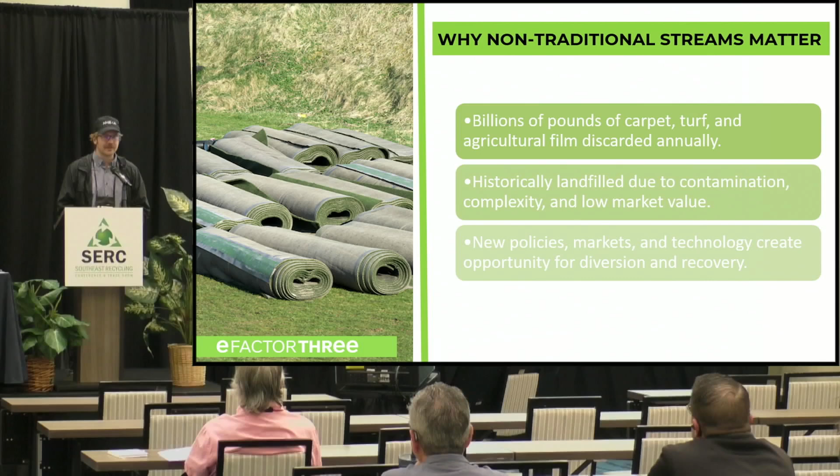Here's a little bit of statistics on those streams. Carpet makes up 4 billion pounds annually, and less than 10% of that is recycled. A big part of that is because it's simply difficult to recycle, and a lot of people don't have those solutions. Artificial turf is well over 200,000 pounds per field. Agricultural film is over 1 billion pounds in North America, and well under 20% of that gets recycled. This is luckily being phased out, but a lot of this stuff gets burned in the field. They collect it up, put it on the field, and burn it.

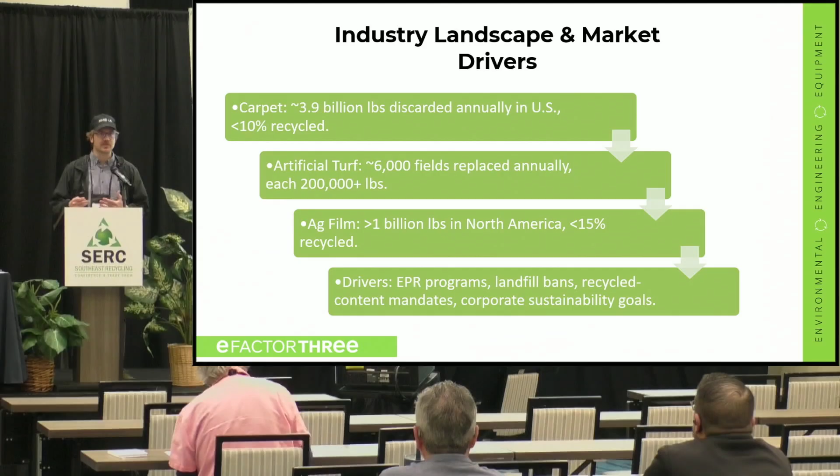What drives the ability to recycle these things? EPR programs, landfill bans. We've seen this in California. California has mandated that certain percentages of organic materials are taken out of the stream before it goes into a landfill. That's allowed us to go in and help our clients recycle more of their streams, even going into landfills, not just traditional recycled streams.

What generally makes these non-traditional materials so difficult? One thing is multiple layers. It's very easy to recycle a pure polypropylene or polyethylene stream, but when you have things like carpet or multi-layer plastics like you might see in a yogurt cup, that gets more difficult, because how are you going to separate those materials and then process them all individually? Each different yogurt cup or each different carpet might need a different processing technology.

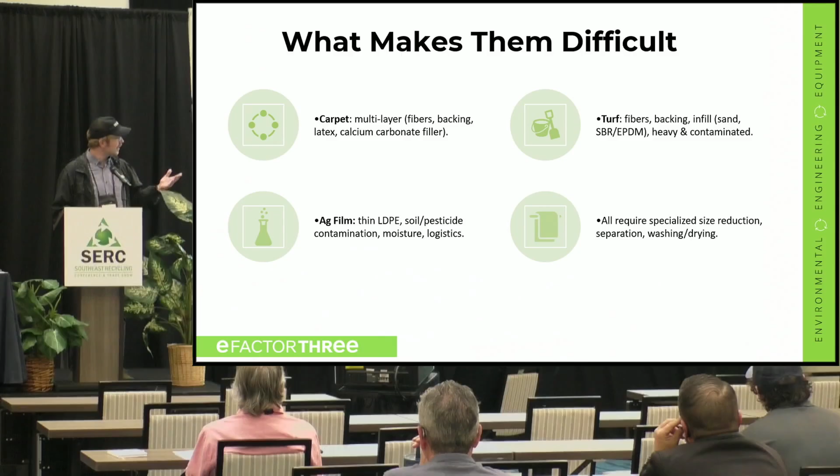Turf and agricultural film are difficult because they're thin and have been sitting in the sun for 6 months. UV degrades it, it can kind of fall apart just like feathers. Not only that, it weighs pretty much nothing when it's dry, so it's difficult to transport. All in all, these different material streams require specialized size reduction, separation, washing, and drying technologies.

So where do we see most people go wrong? eFactor 3 has been around for 20 years, and in those 20 years, we've worked a lot with companies trying to attack these non-traditional streams. What makes them so difficult? Number one, I think the most important, is underestimating just how dirty these things are and how difficult they are for the machinery.

Let's take agricultural films, for example. Agricultural films can be 50% dirt, just grit, sand, corpses of dead animals. Anything that you would find in a field on a farm, you can find in these streams of material. What that means is it's really tough on any machine you run it through. A shredder or a screen will quickly degrade or wear down and need constant preventative maintenance. We see people constantly underestimating those needs.

That ties a little bit into those operating costs. Clients will see a low price tag on a line from a different vendor, and yes, that line might be able to get them started, but what they don't see is the high cost of then keeping that operating because of the difficulty of the material.

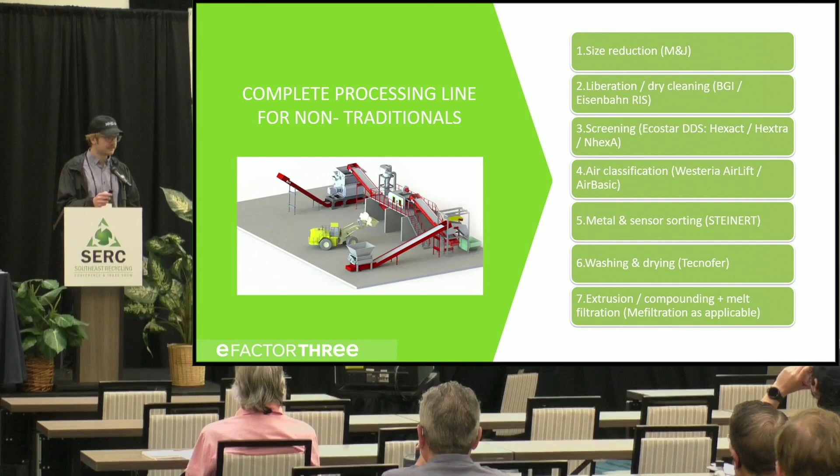How can E-Factor 3 help? Well, exactly that experience. We have seen these projects from beginning to operation, and we've seen the missteps that people have made in these non-traditional waste streams.

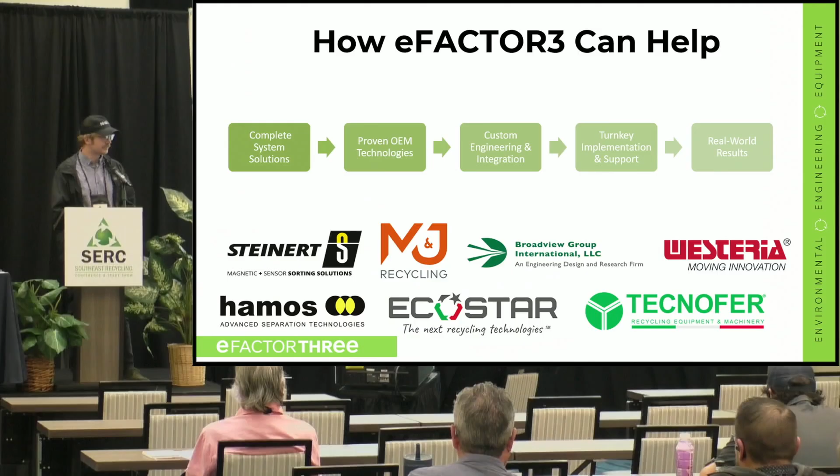As I mentioned, the M&J pre-shredder, primarily a pre-shredder, but they also produce fine shredders. What's important here, again, is the coarseness of the shred and the robustness of the machine. The pre-shredders do not do a shear cut, right? They're not like a traditional fine shredder. They simply pull the material apart. That's important so we have that initial step of separating the material and liberating it.

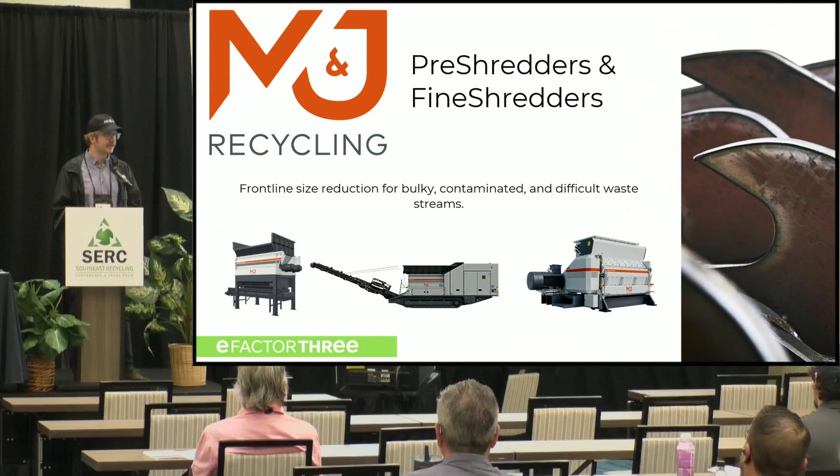If you have layers of plastic stacked on top of each other with dirt trapped in the middle, you need a way to get that dirt out in the first place.

This is our newest partner, Broadview Group International. They produce a piece of machinery called the Rotary Impact Separator. This is a form of dry cleaning, but instead of relying on friction, it's essentially a modified impact separator, kind of like a hammer mill turned on its side. The reason this is so effective for agricultural films is, again, we're not relying on that friction.

That's a misstep we've seen a lot of manufacturers make. They use a traditional wash line, like one used in bottle recycling, and try to use it for agricultural films. Both the manufacturers and our clients haven't taken into account how different this non-traditional stream is. That dirt contamination settles in the bottom of their tanks, and then they have to stop, and one poor schmuck literally has to dig dirt out of the bottom of a tank.

But the Broadview Group International RIS is different in that it uses pure dry cleaning. We can get to about 1% ash content and 0% humidity in one pass.

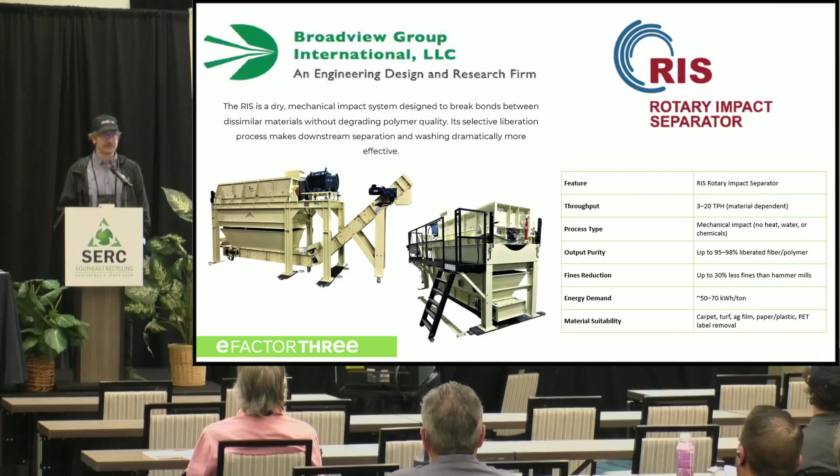This is another one of our partners, EcoStar, and what's important about this step in the process is the screening technology. If you've liberated the material and put it through the pre-shredder, you now have a separated piece of plastic with a bunch of dirt on it. You don't want to take all that dirt downstream, so you can shake a lot of that loose stuff off before you ever go into your cleaning process.

So we pre-shred, then we screen, and then we'd go into some kind of dry cleaning process. Now, if the client needs cleaner material, we can go into a wet washing process, but it's critical that we take these steps beforehand.

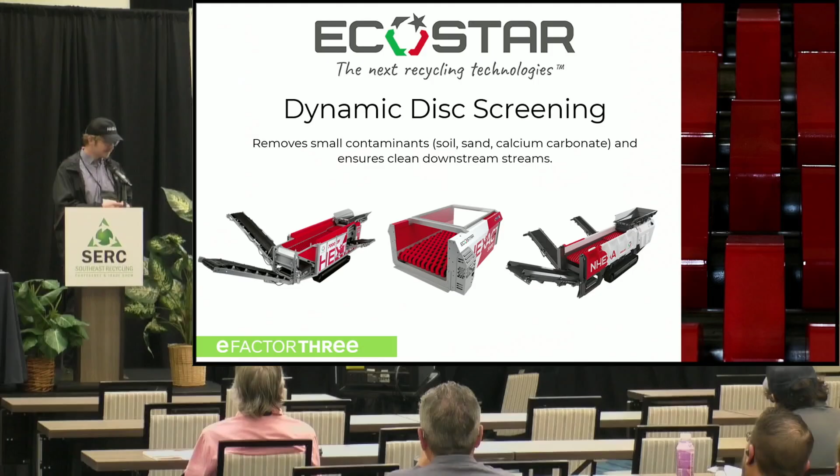This is another technology we've worked with for a long time and recommend for these applications: the wind sifter, for density separation of materials. In agricultural film streams, you get anything you'd find on a farm—crowbars, root balls, rocks, all kinds of stuff. With a wind sifter, you get out that heavy material. Each step in this process has a very specific reason, and we've come to those conclusions over years of testing. So the wind sifter takes out all those really damaging, heavy pieces of material.

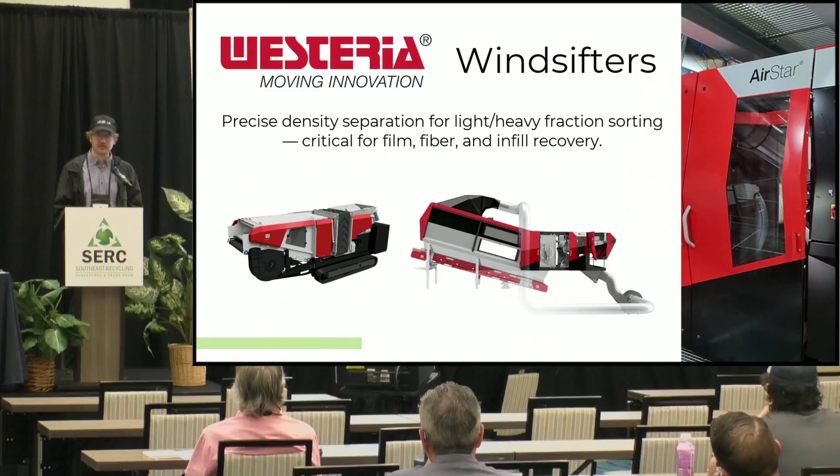I don't know if either of them are still here, but one of our main partners, Steinert—Tim Berry and Scott Chase—were here yesterday. They produce magnets and eddy currents, which are essential in really any recycling business, because anyone who's operated a fine shredder knows what happens when you put metal inside one. Boom. That's never a fun day, especially for your maintenance crew, and it's also costly on the accounting side. So especially in an agricultural film application, we need some kind of magnetic separation to get out these pieces of contamination you'll find on a farm.

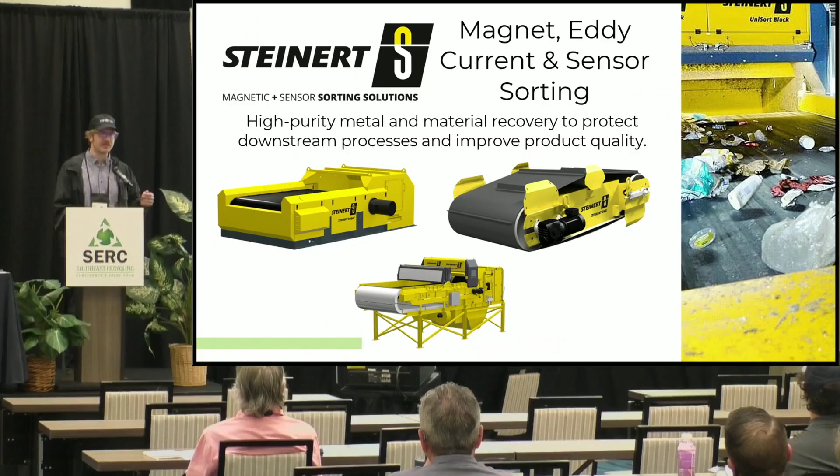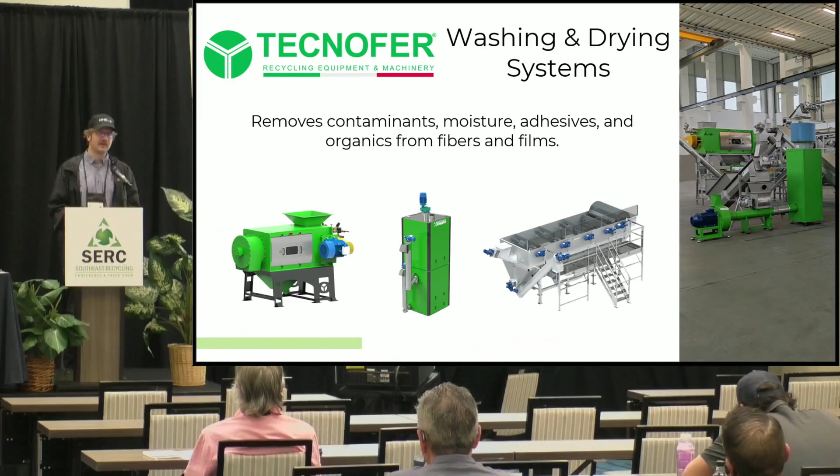What happens when we need to go so clean that we want to go back into blown film or something? Well, then we can go into a wet washing process—friction washers, sink float tanks, etc. These can help us get down to almost 0% contamination so that we can go into delicate injection molding processes, blown film, and so on.

This is just kind of A to Z how we would set something like this up. Again, we're pre-shredding—this is not a fine shredder doing a shear cut, just pulling the material apart. Then we pull out the metal so it doesn't affect our downstream equipment. We screen that material so any loose stuff already gets out—we don't want to put more dirt through a washing system if we don't have to, so we take out any loose dirt we can. Then the wind sifter takes out any of those heavy things that might have been too big to go through the screen but that we still don't want in the downstream equipment.

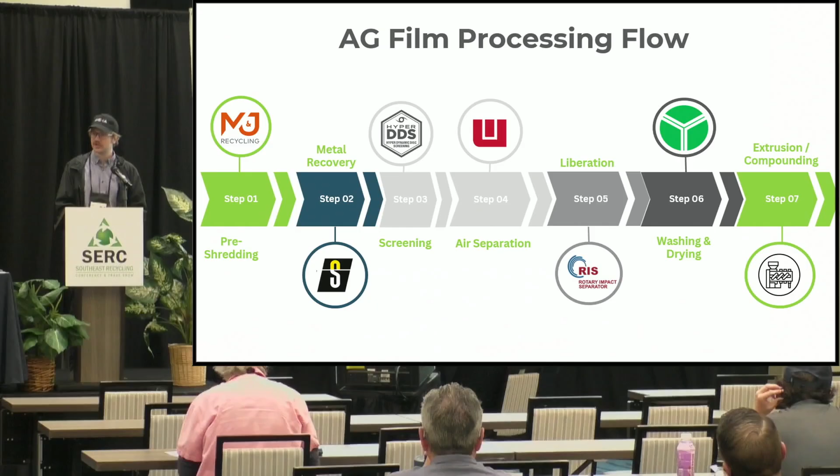The RIS impact separator can now get us down to about 1% ash content and 0% humidity. As mentioned, when we're going into delicate end products, we might want to wet wash that material. And then, last but not least, extrusion and compounding.

I'll give you a little background. We started about 20 years ago in the biomass arena, processing primarily corn stover from the Midwest and making fuel, so we're funded by the Department of Energy primarily—we're more of an energy research laboratory. Just a little information: people think, oh, you have a small laboratory, but the INL is bigger than the state of Rhode Island. We're actually a big area-wise facility because primarily what we do is nuclear research, and we take that research out in the middle of nowhere—the government owns all the area around it. So we're a very large landmass of a research facility, and a small part of that is the bioenergy program we're part of.

Back to that—we started out with corn stover. Back then, the concept was take the corn stover, make it into a pellet, transport it wherever needed, and make ethanol from that. That was originally the direction we were going. Since then, we've moved more into electric vehicles than gas cars, so we've kind of gone away from ethanol, but we still process corn stover. We do a lot more than that now, moving into MSW and e-waste and different things, because of the knowledge we gained in processing materials. Again, we're a research facility.

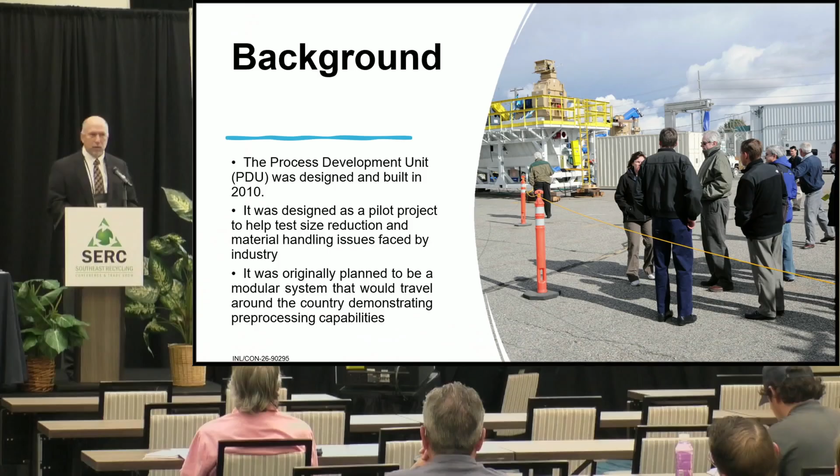We work with industry to help them overcome some of the challenges that they're facing, help de-risk and take care of some of that processing stress away from them as they're building new processes.

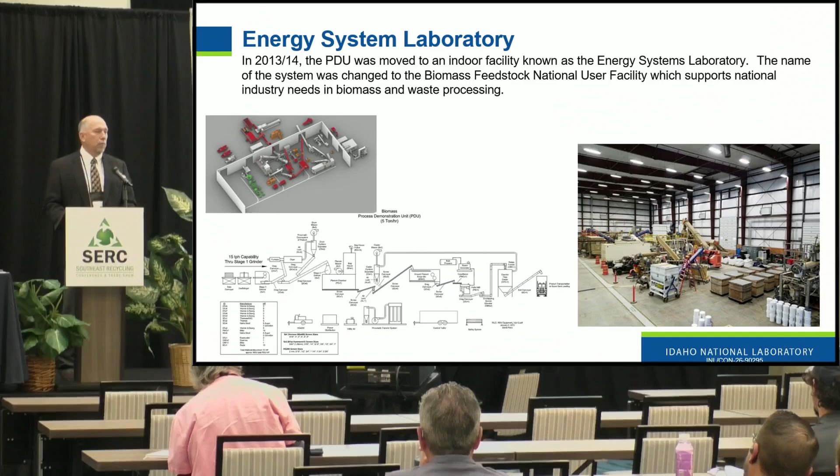Back in about 2013, 2014, we moved into the facility where we're at now and got the designation as a national user facility. Prior to that, as a process demonstration unit, all of our system was built in cargo containers, and we could ship it around the country. That was kind of our thought, that we were going to go around and demonstrate all around the country. We never really did much of that. We stayed pretty much in the Idaho Falls area, and in fact then moved inside this facility we have now and set up our system there, and it's more permanent. We still have the ability to loan out equipment and go test other places, but we really primarily operate out of the Idaho Falls area.

Like I said, we started out doing corn stover and wood waste. Making ethanol was our early process. Now we process a variety of different materials, whatever our industry partners come to us and say, hey, we need help with how do we process this material. So we've done windmill blades, municipal waste, circuit boards, in addition to the traditional corn stover and other materials we started out with. When we started out doing the corn stover, the concept was let's do it in as few steps as we can to get the product into a pellet and get it out and move it downstream.

Just like what Lennart was talking about, some of those steps are important. You can't eliminate a step and think that you're going to be successful downstream. Early on, the industry really pushed to say, we're going to grind these bales in a single step. Well, you talked about how much dirt and stuff comes in with the waste you got. The same thing is true of a corn stover bale. We get a corn stover bale in, maybe 30% dirt, and we might have a hammer or a crowbar in there as well. And if we try to grind that all up in one step, we're going to damage our equipment, and we're just going to send that material downstream.

So we learned early on, it's important for us to break that bale apart, get the dirt out, get the rocks out, the contaminants out, and then start processing it in a way that's going to give a better final product to the end user. We've taken that concept to all of our different materials.

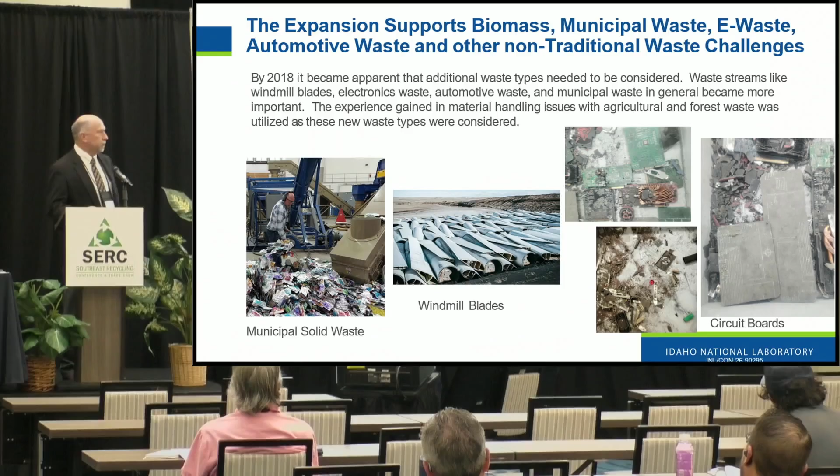Back in about 2020 and 2021, we had an expansion. We realized how important it was to have these different components in our system to be able to screen out contaminants, grind specifically to what our customer or our partner was needing, and then make it into a final product. Again, our primary goal along the way has always been energy.

Now we work with industry partners, and that may not be the case at all. We've worked with companies like Kimberly-Clark making toilet paper, R.J. Reynolds making paper for tobacco. So we've done a lot of other things besides energy, but that's our main focus from our funding from the Department of Energy.

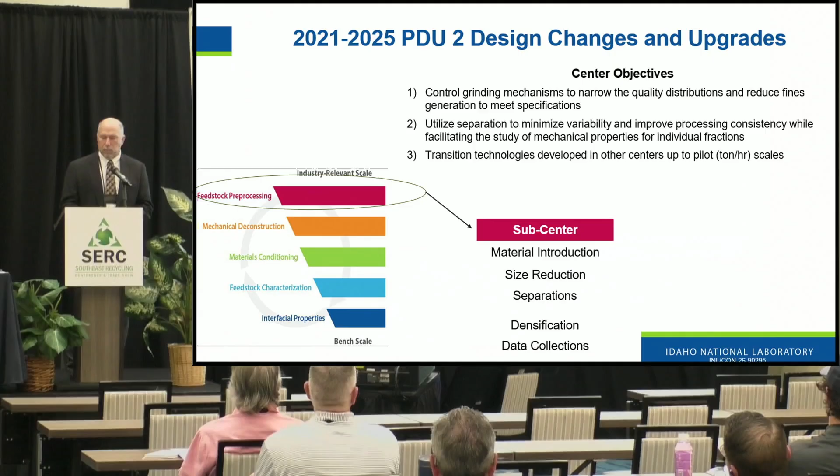But we started building this facility up and expanding it, really looking at how do we take that material in, how do we get it broken into or fed into our system so that we can pull out contaminants, what type of screens, what type of grinders do we use. So we started building a different system than what we started with when we were just primarily working at corn stover.

So again, looking at material introduction, we partnered with a company right now, Warren & Baerg out of California, where we originally were doing this baled corn stover, now where we want to handle MSW, and it's a whole different process. So they've been working with us to develop a debaling system, so we get in the baled MRF residuals, for instance, and want to break those apart.

We have a lot of trouble with those, the film plastics wrapping around our mills. So how do we break that bale apart, pull out the film plastics at the same time, get that material flowing to where there's still a lot of rocks and grit and glass in there that we want to pull out and start sorting that. So material introduction, I call it, is the important first step of that. How do we take that material and get it flowing into our system where we can start working with it?

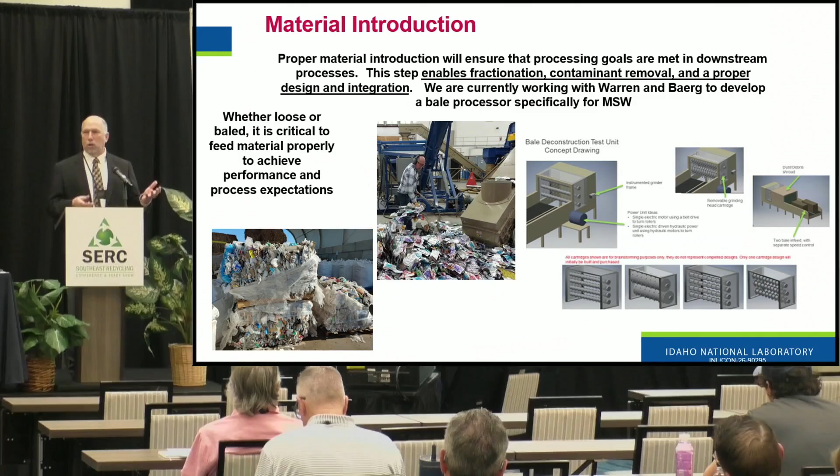Then we've got a series of different types of grinders that we work with. Some of the folks here at the expo, Vecoplan is one of the shredders we have. Forest Concepts is a system we have. We work with ball mills and with the circuit boards. Hammer mills was our old go-to from the beginning. Knife mills and different. So depending on what our customer comes to us with and says this is the material we want, we're going to use a different type of mill for that process.

Or if we are working with a MRF residual like we are in this case, we're going to try to separate the plastics from the paper and cardboard, and each of those may go through a different milling process.

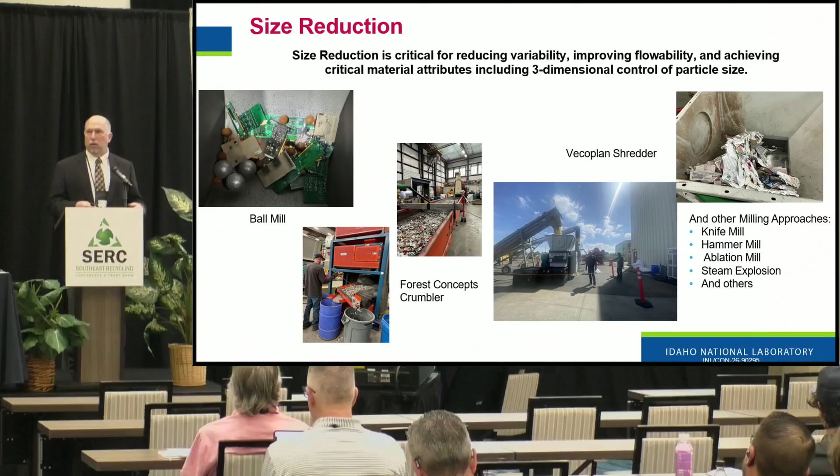Separation and sorting is a big part of what we do, and same with what Lennart was mentioning, we got to get the dirt out. So in this case, Stadler's here, we actually have one of their ballistic screens here. Let's say we're dealing with MRF residuals. We're going to bring that material into the ballistic screen fairly early on. It's going to separate out our two-dimensional, three-dimensional materials, drop out 2-inch minus out the bottom, and each one of those streams we're going to process differently. So screening and separation is a big part of what we do.

Even if we get down to maybe we've isolated plastics, there's different densities of plastics, and we'll size those to a certain size fraction. We can separate that based on density.

So again, just depending on what the customers are after, we're going to tailor that process and help scale that up. We aren't a production facility, but we can produce material up to 5 to even 10 tons per hour for some processes. We typically, a lot of our testing is done on daily small batch operations, but we have tests that have run for 6 months, 24 hours a day. So we can tailor our process to what a customer needs.

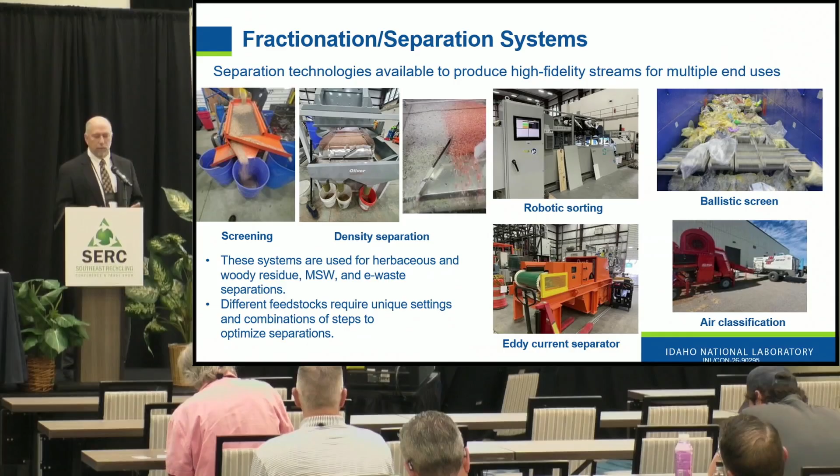And again, we're a user facility. We can operate a number of different ways. We have grants and funds that we can help work with you directly on, but when we do things like that, usually we want that publicly disseminated information. We also can work off of a private contract with an individual as well. Anywhere from public information that gets put out and we fund it completely, to completely funded by our partner, and the data is completely proprietary. So any of those processes in between there is what we can do.

Again, going back to the screen, in one case we were working with a local Native American tribe close by us, the Shoban tribe, and we were working with black bag garbage directly from residential waste. They wanted to look at what they could do, they didn't do any type of recycling at their facility, and we were working with them to help them identify what they could do.

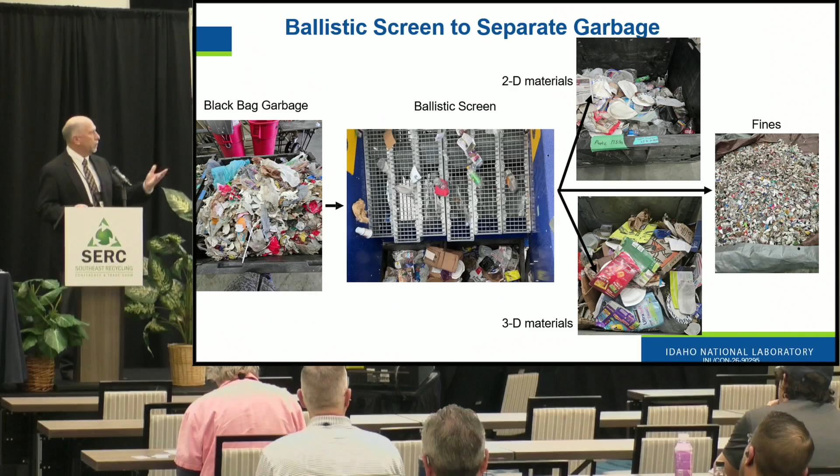So we took in black bag garbage, ran it across the ballistic screen, got the 3D material and the 2D material separated out and the fines, and then started looking at how we handle each of those different materials.

We took the 2-inch minus material, ran it across the disc screen, got some more of the contaminants, the grit and stuff removed out, and took the remaining material and went through a size reduction process and a density separation. So we were then able to get our high density plastics in one fraction, and this is just with a single step depending on what our customer might want.

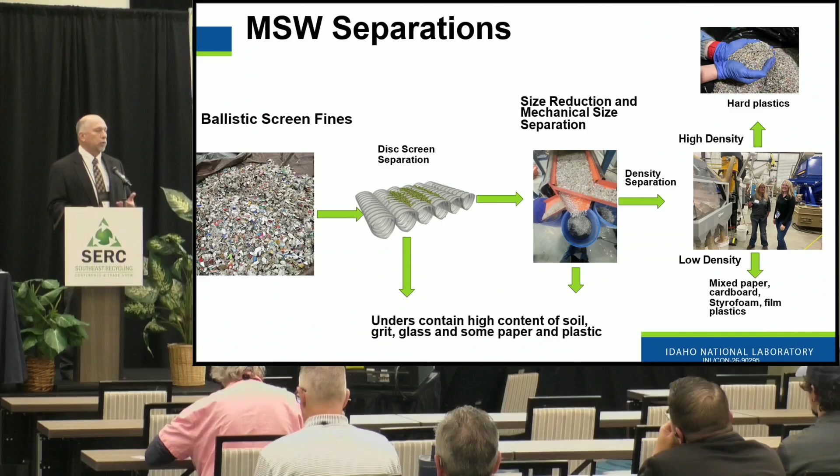We may go through multiple steps, but we got the high density plastics separated from the mixed paper, cardboard, and styrofoams. We could then take that again and split that further and separate the material even more. We were able to do that in just a couple steps. So we're debaling, running across the Stadler, going across the disc screen, pulling out the materials, size reduction, density separation, came out with a very high concentration of high density plastics, and we're then extruding that into a filament that we could 3D print with. More of a demonstration than production, but it showed what we could do with just black bag garbage.

Again, so we took the other two fractions, the 2D and 3-dimensional material, and went through sorting processes with it as well. Air separation is one of the things that we were demonstrating in this case. Took that material, dropped out the heavy materials, similar to what was being done before, dropped out the contaminants, the metal, the dirt, the rocks that might have been in that material, and then concentrated the higher density plastics and aluminum cans, different things from that waste.

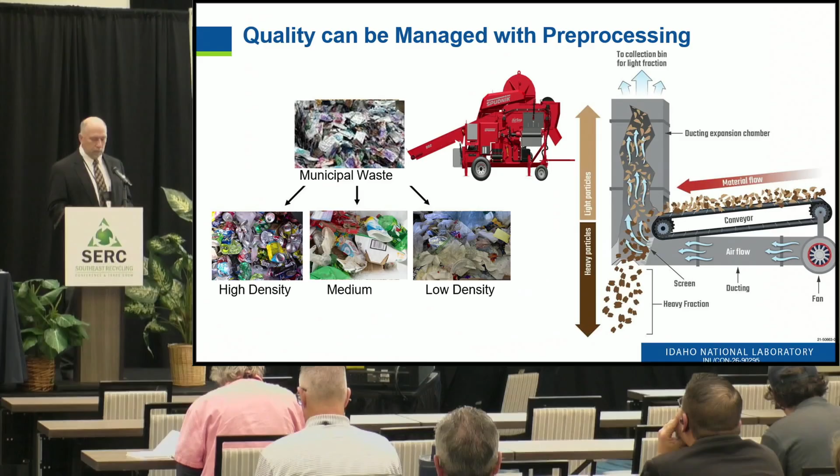You mentioned eddy current separation and magnetics as well - that's part of what we have to offer within our system. So let's say we're taking that 3-dimensional material from the Stadler ballistic screen. It's got a lot of aluminum cans in it. We're going to run it across the eddy current separator and pull out those aluminum cans. That eddy current separator is going to pay for itself pretty quick in just separation and collection of aluminum cans.

But it also does well at getting out other things like copper wire and different things that we don't want in our downstream processes - it affects our mills. We don't want that kind of metal contamination going into our plastic streams. So we can separate the ferrous out with magnets, the non-ferrous metals with eddy current, and then a rock trap just to remove any of the other heavier density material like rocks, grit, and glass.

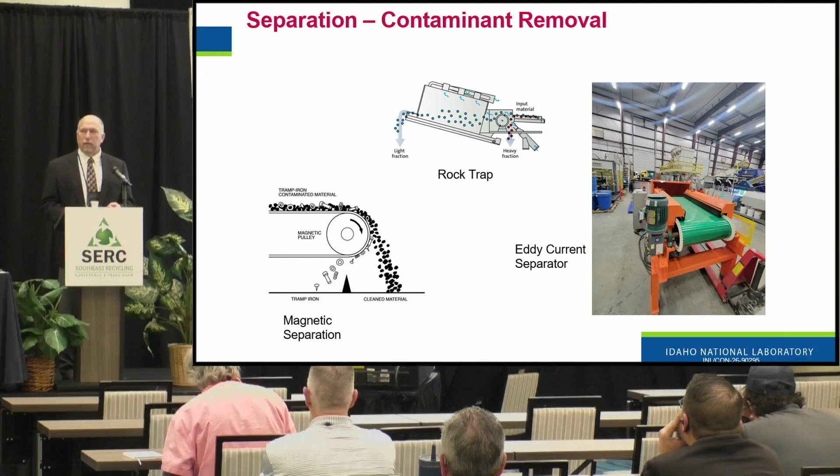Densification is another capability we have. We have bench scale pellet mills all the way up to 5 tons per hour systems. Most of our pellet mills are Bliss, but we work with others as well.

So we can take that material, create something that's very low density. You talk about the feather type stuff that's very hard to transport - we can take that and densify it. Now we've got a product that's much higher density, and we can transport that or feed it into a process, whatever the case may be.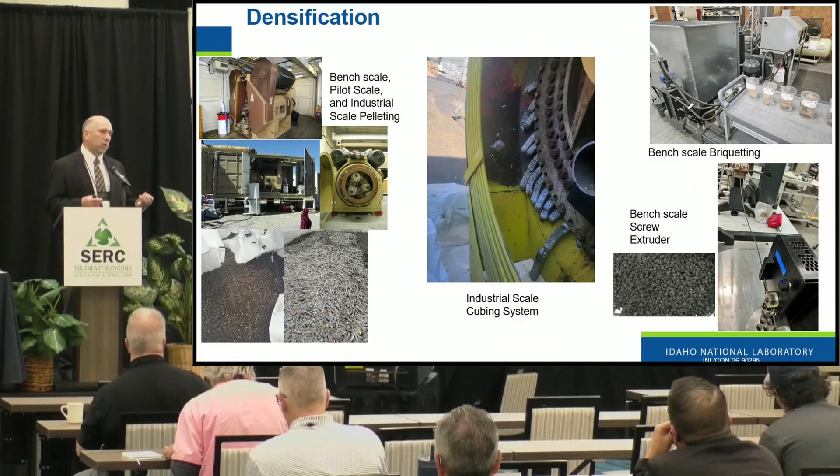Another capability we have in-house - within our group we've got technicians, laborers, all the way up to equipment operators, and then our researchers, PhD engineers and scientists that we work with. A couple of the capabilities we have are in software and electrical engineering.

So we've developed digital models of all the equipment within our process. We can work with the client, understand what they're processing, and model that material before we ever go into the lab and actually run it.

The models are only as good as the data you put in. So if it's a completely new process, we may need to generate some data before that model is really effective. But once we have that data, if you come in with a material type or a new process, we can model that for you and help you understand a better idea of how that material is going to perform before we even put it in the machine. It helps us reduce the number of in-the-field tests we have to do, because we can at least narrow down how we want to operate our tests.

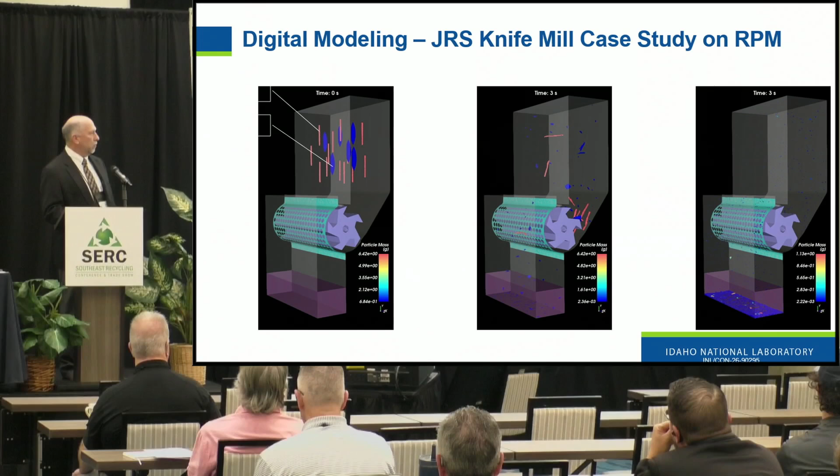We've done this for almost all the equipment within our facility. Data management is very important as well. Every motor in our process is collecting data, connected to a network, to a computer system where we're collecting that data, and we've done that since we first opened the facility back in 2010.

So I can go back and say, okay, I want to look at all the times we've run corn stover, and I want to run corn stover at 10% moisture with this grinder - how did it perform? We can pull all that data, and that's publicly available data we can share with any of you. How is that going to perform for your material? If we've run a material like what you've done before - numerous kinds of woods, herbaceous materials, getting into MSW garbage, plastic and things - all that data we've recorded and kept for customers in the future.

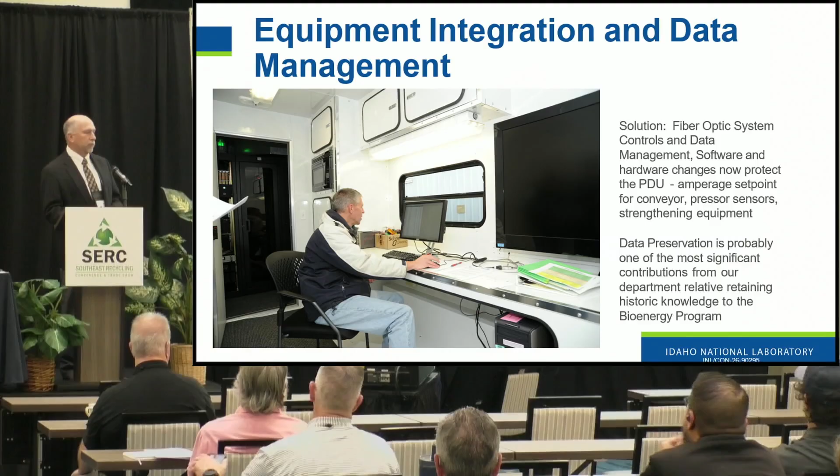And how do we use that data? Here's an example. Early on, when we purchased the system we have now, back in 2010, we were operating corn stover. Our manufacturer gave us a nameplate production rate we should hit - it was supposed to operate at 5 tons per hour, and we couldn't hit it, especially with a little bit of moisture in there. We couldn't hit that nameplate production rate, and we're like, what's going on here? We're feeding the system, trying to run at 5 tons per hour, and we're just not hitting it.

The feed tables, we got it set. It's feeding in what we think, but it's kicking back, it's pushing back all the time. So we start looking at that data, and we realize...

This was a high-speed mill running corn stover into it. The way the bale of corn stover is made is it's made in sections, or wafers, or leaves, as you call it. So it also comes apart in that same manner, and tends to not pull apart evenly. You get these wafers that come off in sections from the debaling system, and those bunches of material create uneven flow that affects us downstream.

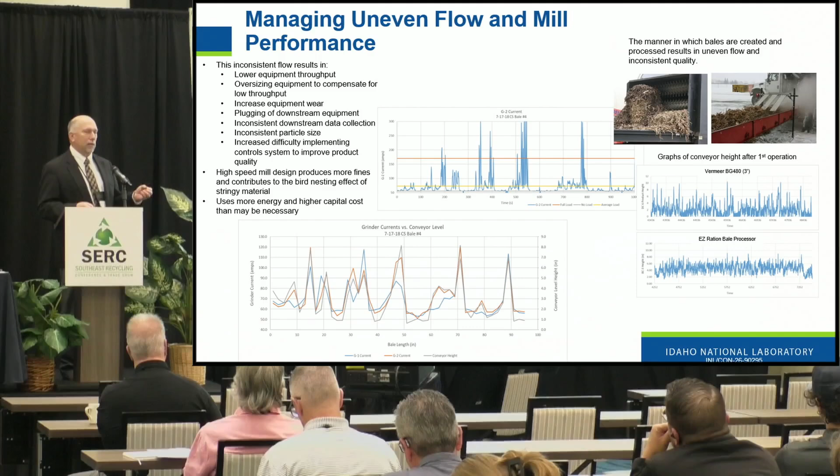My point there is just that we were able to take data from our system and begin to understand why it was not performing the way we want it to. That's what we use all that kind of data for - how do we see why moisture affected something, why a different screen affected things a different way. That's kind of a big part of what we produce - not the material that comes out, but the data that comes out of those runs. That's just as important as the actual material itself.

So just wanted to give a shout out to our team. Again, we've got a team from technicians and laborers all the way up to researchers. Got a good group of people that we work with.

Recently had a ribbon cutting where the Secretary of Energy came out and visited our facility. We work with a lot of industry partners, really have a great team. We bring in interns from all the way from high school on up to college to get them indoctrinated and prepared to work in the real world with this. Really have a great facility.

As I mentioned, one of the things that we do is work with industry partners to develop new things. For example, the debaling process with Warren and Berg is one of the systems we worked with our industry partners to develop new pieces of equipment. We just brought in a new torrefaction system, so we work with thermally treating materials to help us in size reduction and preparing that material for downstream separations. We work and partner with a company on torrefying material.

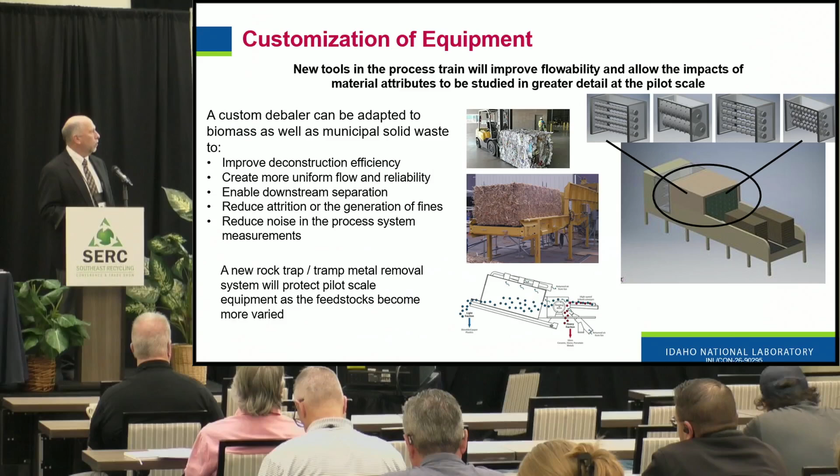I haven't mentioned drying, but we also have a rotary dryer within our system. So again, drying, screening, size reduction is all part of what we work with here. We also have our own fabrication shop, so if there are parts and pieces that we need to build, we can build those in-house if we need to do that.

What does that mean for industry? The whole idea of this is we're a national lab with a facility designed to be a user facility for industry. We want industry partners to come and utilize our facility rather than try to build something themselves. Let us take on that risk. This is built from tax dollars from you guys, thank you. Let us help you scale your processes up to where you can go back to your investing partners and say, look, we've tested it here at the National Lab. We're ready to move to that next step and go into the field.

Don't make that jump from laboratory to the field without doing some pilot scale research. That's what we're here to do, is help de-risk that for you guys and get you the results you need so you're more confident in the data you're producing. Pilot scale testing is a big part of what we do. We also do very detailed laboratory research, where we have funding from the national labs all the way up to just partnerships with industry is where we get our funding from.

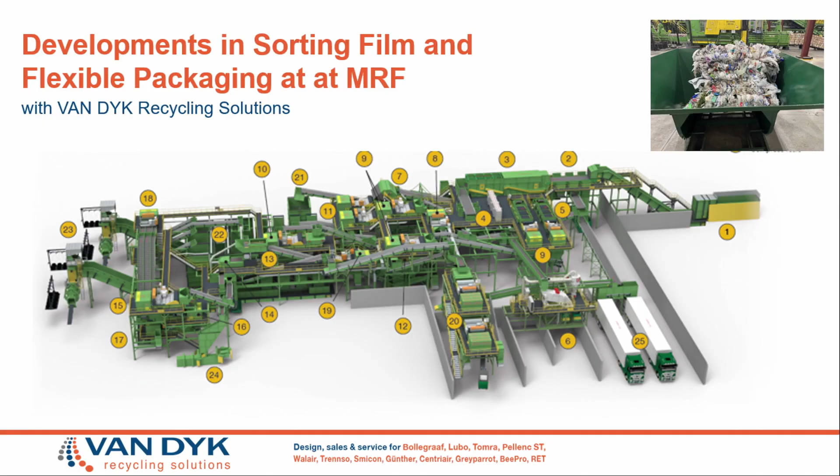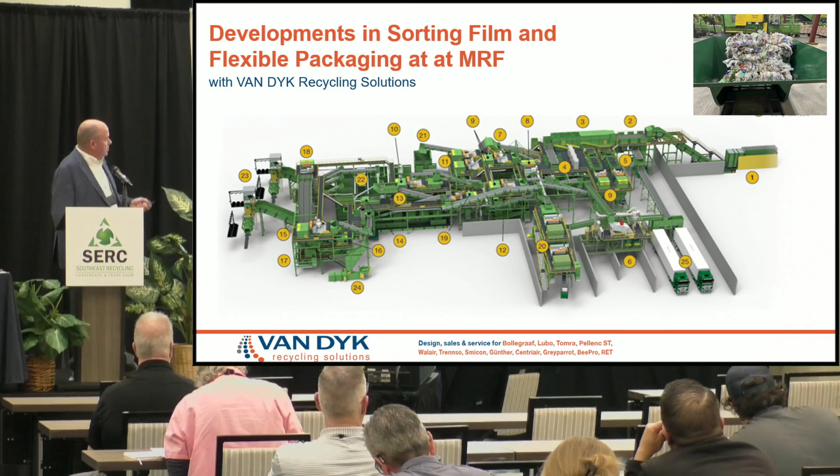I'm going to talk, this was a panel about innovations to recover more. I was added to the panel late. Our company primarily is in the MRF space, so that's what we're going to focus on today: developments in sorting film and flexible packaging from a MRF. My agenda is to explain who I am, who is Van Dyk, talk through some recent projects that Van Dyk has done, give you a little history on MRF film as we see it, and then talk about preparation is the key. I've given that talk before, but I think it's still relevant to the MRF space. Then talk specifically about clean MRF film being made today, and open it up for Q&A.

My name is Mark Neitzey. I've now worked at Van Dyk for 25 years, the last 12 to 14, because I took a little hiatus as the sales director for Van Dyk. A graduate of Texas A&M, where my wife also went, and that's where my 3 kids attended as well. I base myself in Houston, but I'm on the road every week seeing a different facility around the country, and I've really seen MRFs evolve and change over the years, and hopefully that will show in today's presentation.

Who is Van Dyk? Van Dyk is headquartered in Norwalk, Connecticut. We have been in business since 1984, providing best-in-class MRF equipment. We do turnkey design, supply, installation, and service support, primarily in residential recycling systems or MRFs, material recovery facilities. Since 1984, we've done over 2,400 projects. We have equipment in 250 single-stream MRFs.

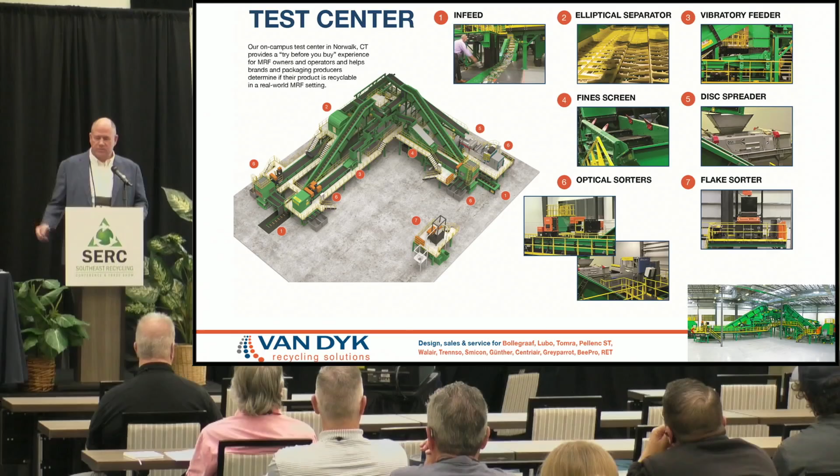Like Neal's lab, we have a test center in Norwalk, Connecticut that is for everyone in this room's use. Whether you're a brand owner or a MRF operator, if you have something questionable—can it be recycled? Can it be seen by the technology that's out there today? We don't just have an optical on a loop, we have a full-blown test center with screens, ballistic separator, multiple scenarios or situations for setting up an optical sorter.

Also at Norwalk is our large parts distribution warehouse where we have $35 million in spare parts needed to support today's MRF. Today's MRF runs 24 hours a day, 2 and 3 shift operation. The material will not stop coming in, and downtime is super critical to these plants, so this is a big facility based in Norwalk, so you can easily access parts.

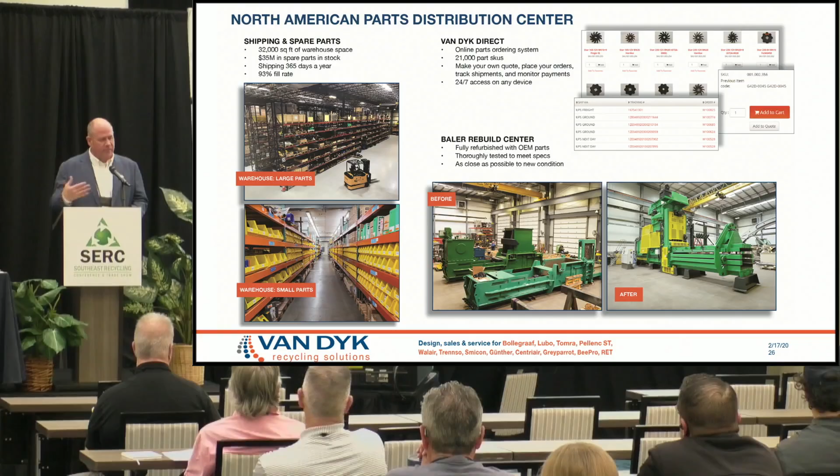We also have a factory rebuild shop there, and that factory rebuild shop is where we bring in maintenance and operations teams from around the country for training. So we have Van Dyk University that offers training for balers, for optical sorters, and for control systems. That's a picture of our service team.

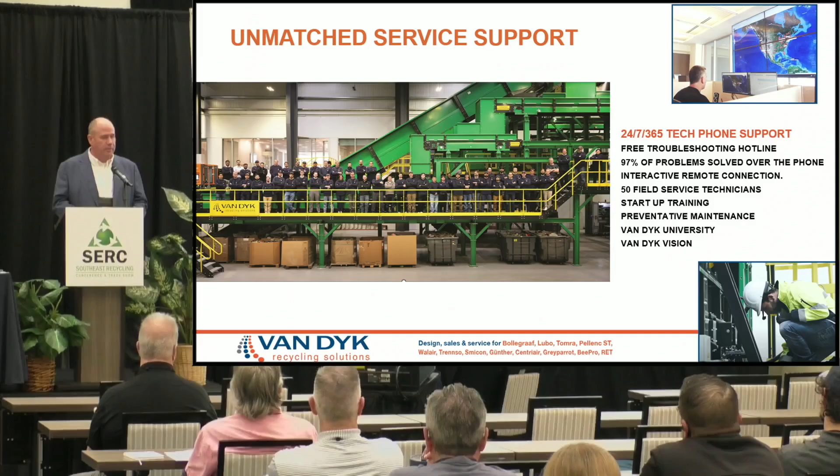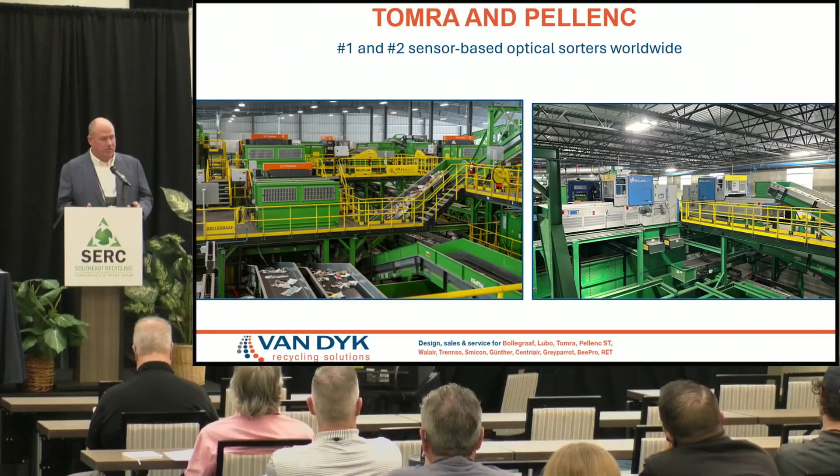We have 50 employees that are factory-trained service techs based all over North America. They support the equipment that we've installed. Two of our equipment partners, Tomra and Pellenc, are ranked number 1 and number 2 in the world for sensor-based optical sorters, so we're proud to be partnered with both of those companies.

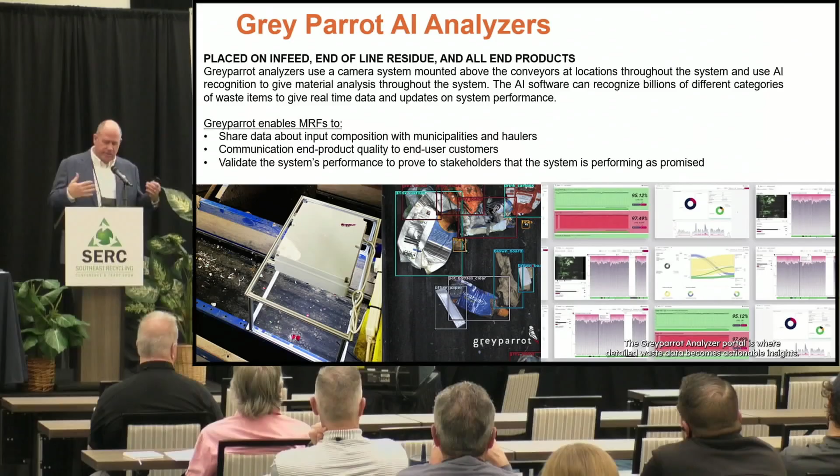A recent addition for us is Greyparrot AI analyzers, which allow you to place an analyzer in different places of a MRF and collect data. That data can be used to learn about input composition, learn about what's being lost in the end-of-line residue, and also track the quality of all the products you're making and share that with your customers. We're just at the front of this, but we're having really good feedback from where we've installed the Greyparrots, for the amount of data you're able to see and then in real time make changes to your system to make sure it's optimized to its maximum performance.

I'll breeze through these, but these are recent projects that Van Dyk has done turnkey. We did a large plastics facility for Freepoint in Ohio - a mixture of rigid and film plastics that's ultimately being made into pyrolysis. We did the single stream system in Connecticut, shown in the middle slide. That's where we have 15 Greyparrot analyzers - that's where all the data is coming from in real time for a MRF.

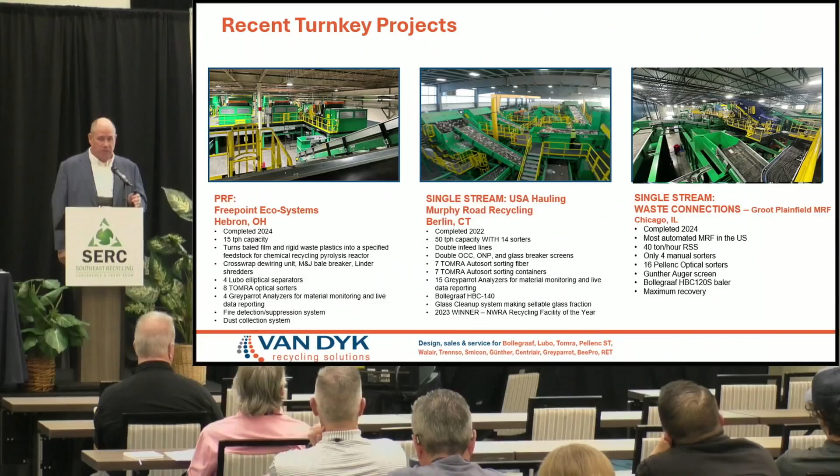The picture on the far right is the Waste Connections Groot Plainfield facility in Chicago. They don't publicize this a lot, but this is the most automated MRF in North America today. They're doing 40 tons an hour with only 4 people in the plant. So it's a pretty impressive plant to see if you'd want a tour.

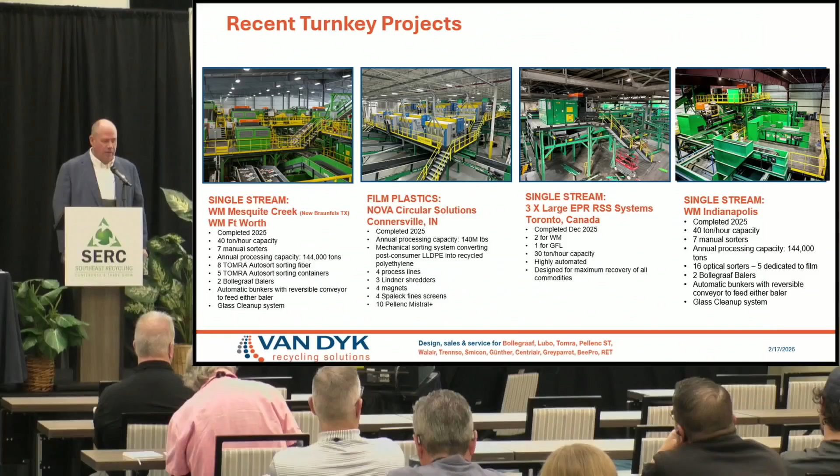Basically our ops team spent most of 2025 installing these systems. We did 2 large 40-ton-an-hour systems in Texas for WM. We did a large film processing plant in Indiana for Nova. We did 3 large EPR plants in Canada for the CMO of Canada, 2 with WM and 1 with GFL. And we've just finished up commissioning the Indianapolis plant for WM. It's got some innovative film stuff that we'll talk about in a second.

All right, we're going to shift gears and talk about the history - I know this might bore people to death, but the history of MRF film. For those that don't know, single stream recycling collection and then single stream processing was really born in the late 1990s, early 2000s. So we're only 25, 26 years into single stream processing as we know it today.

In 2005, very early on, you started to see pre-sort - that's the conveyor where the inbound material is first seen. You started to see film suction systems added to pre-sort. Here you'd see 2 guys grabbing film, flexible packaging, bags, holding them up, and they're being sucked up into a tube and transported via pipes to a material separator, dropping down into a bunker. This trend started in 2005, and within about 2 or 3 years' time, most of the MRFs you would visit would have some sort of film suction system on the front end.

However, shortly after that, it was determined that film, primarily grocery store bags, Walmart bags, Target bags, were a nuisance. Yes, you were supposed to try to pick those out on the front end or at the pre-sort, but if you do a calculation on the number of bags in these systems, you would have needed 32 human sorters to sort the film properly, and that's the only grade they would be sorting, and it was a limited market. It was somewhat dirty, there was some human error, and there were still materials left in some of those film bags.

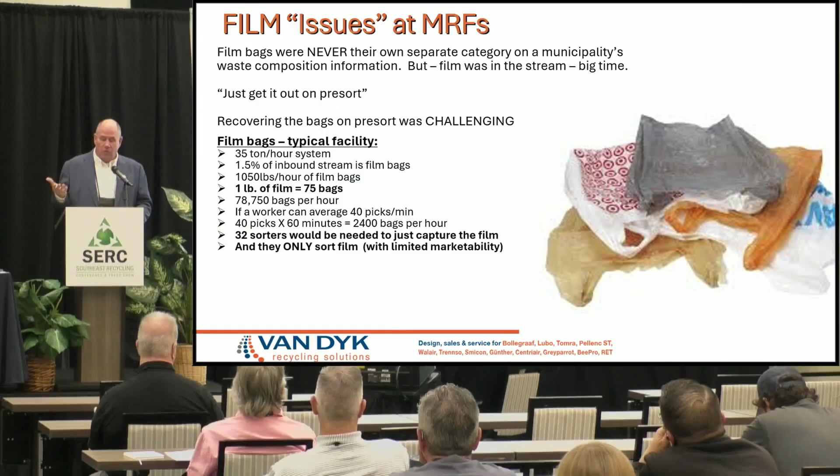So you saw those film systems start to be turned off because there was not a market for that film. You would go and see these elaborate tubes throughout these systems, but most of them were turned off. This is what happened when you didn't grab the film at pre-sort - you had a crazy amount of wrapping on the star screens. This conference and others have talked about this for years, but it was a real problem for MRF technology in the early years leading up to future developments, because you still needed to run at very high capacity and still needed separation devices, but the amount of film being put into the stream really made it challenging for the star screen equipment.

So around 2014, there was a development of non-wrapping star screens. The year my company put our first non-wrapping screens in was 2014. We did it at City Carting in Connecticut, and we did it at Recology Pier 96. It was a game changer for our company, and a little bit for the industry as well.

In essence, it wasn't rocket science. The shafts on the star screen were just made to have a larger diameter to where the film bags would not wrap around the screen. That allowed for, you didn't have to clean every hour, every shift, or at break. The screen still maintained its screening performance. The screens also got wider around the same time, so you started to see plants go to 30 tons an hour, 35, 40, 50 tons an hour.

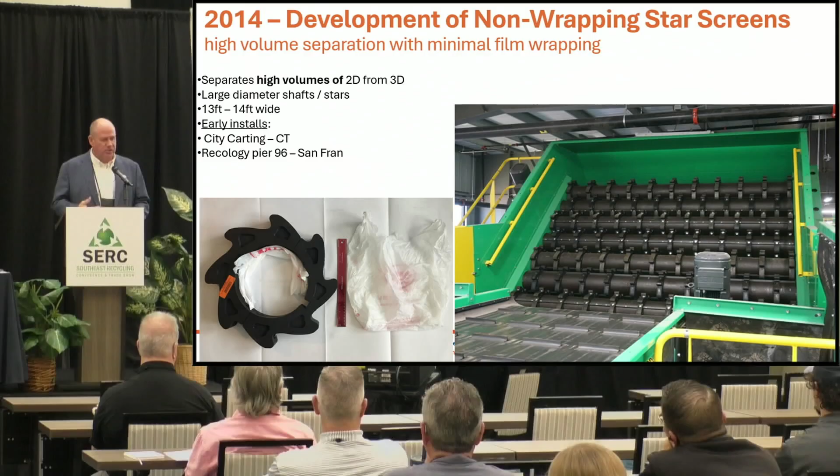So these are large facilities that need high capacity separation. Around 2015 is when you started to see ballistic separators be placed into MRFs. My company calls this device an elliptical, similar to the elliptical you see here on the far right - it's the one I didn't work out on this morning. But in essence, it's a paddle system where it walks two-dimensional light material up the ballistic and three-dimensional rigid material bounces back, and the picture in the middle shows it allows for fines to fall through.

Early on, there were mistakes made by my company and others about placement of this screen, and it was used incorrectly as a paper container separation device. I think that has been corrected in our industry - that's not the norm now. However, if placed properly - right before the container line at a MRF, right before the bottle and can line - that is the nicest, coolest piece of equipment in the entire plant.

It handles the 3 F's, as I call them: film, light sheet fiber, like single sheet light floating fiber, and fines. So film and light sheet fiber walk over the ballistic, fines fall through, and then the bottle and can line is perfectly prepared to set up the opticals to work.

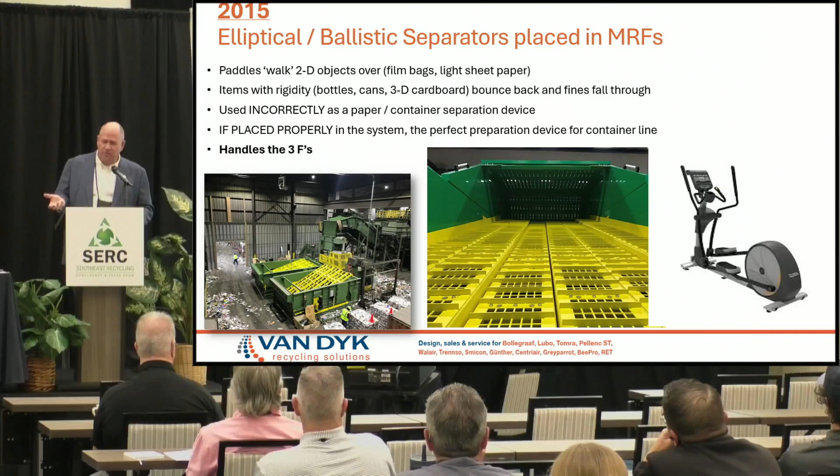A couple other slides about the history. In 2013, we supplied equipment to the Sims group in Brooklyn, New York. This plant is still running today. It's owned and operated by Circular Services. It's hard to believe this plant's now 13 years old. I recommend anybody that hasn't seen it to go see it - it's really kind of a cool facility.

It's not single stream though - it's bottles, cans, metals, glass, all in a unique stream in New York City, all delivered in bags. But we learned lessons here because it has ballistic separators, it separates by size, and it uses optical sorting to make a film grade. So lessons learned from this plant definitely have been applied over the last 12, 13 years.

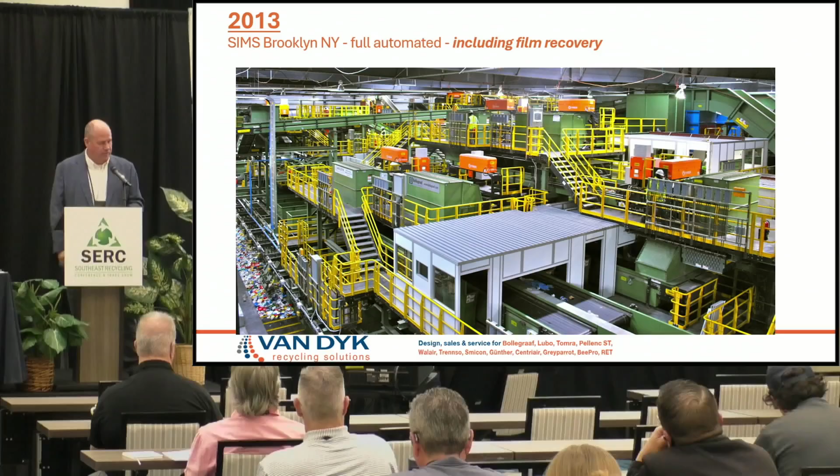In 2018, we were fortunate enough to be awarded the retrofit project for J.P. Mascaro, which was the flexible film project together with RRS, I think was the consultant. This took an existing MRF facility and added optical sorting to try to recover flexible packaging and film - this from single stream. Now keep in mind the previous slide, Sims, is a dual stream plant. This was a challenging installation, challenging project. It obviously got installed during COVID, which also made it somewhat challenging, but lessons learned from this are also paying dividends for us going forward.

Last slide about history - you started to see more of the same type of pipes, same types of air transport system for film, but now bolted on the separation housing of an optical sorter. So for those of you who haven't seen it, an optical sorter has a high-speed belt, with a sensor hovering over the belt recognizing the material, and then an air bar makes a sorting decision to eject what you want it to eject, and pass through what you want it to pass through.

You started to see multiple grades of material be ejected, and then one of these hoods would suck up - let's say you were ejecting all polyethylene, so that means the LD and the HD would be combined - you could then suck up the light film from the HD. It worked a little bit, wasn't perfect, but it was a start. Again, it was a learning process.

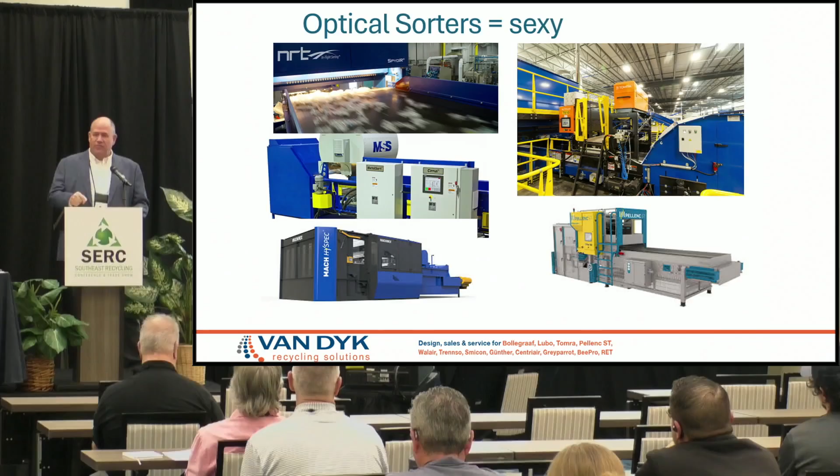Optical sorters are sexy, super sexy. The room would be filled if we were talking about robots and optical sorters. It would be standing room only if we were talking about AI. The four of us are jealous we weren't on the AI panel, because that's a sexy topic. Preparing the material, how we've all kind of talked about, not very sexy.

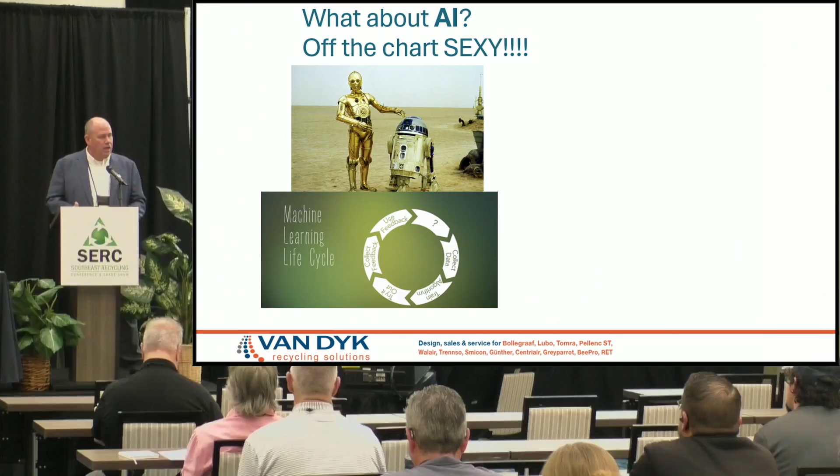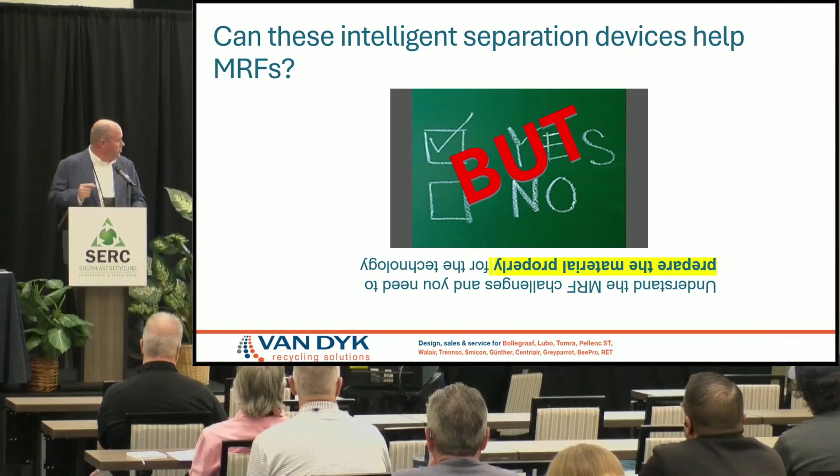But that's what I wanted to show you. There's AI, for some of you guys that don't know that's in the room. Can these intelligent separation devices help MRFs? The answer is yes, but you have to prepare the material properly for the technology.

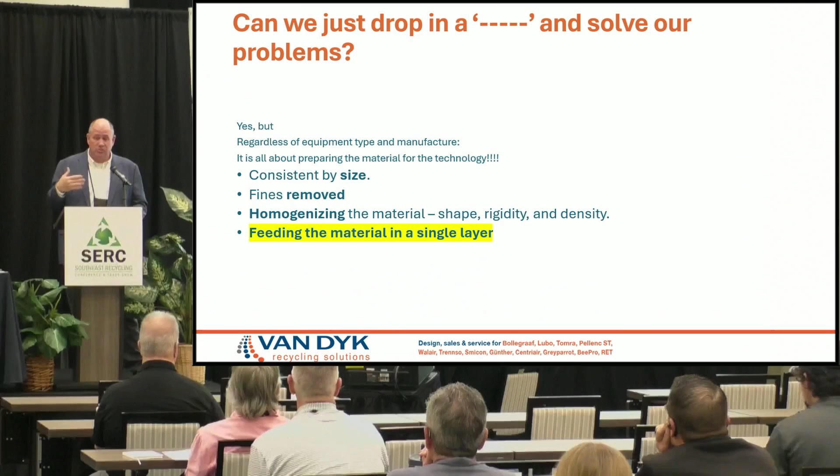You cannot just drop in a piece of equipment to solve your problems. You can't just add AI to monitor the material and get the data unless you can prepare it properly and feed it at a single layer. So there's been several advancements that led us to these more automated MRFs, led us to more intelligent separation, and led us to what we're talking about today, which is film recovery.

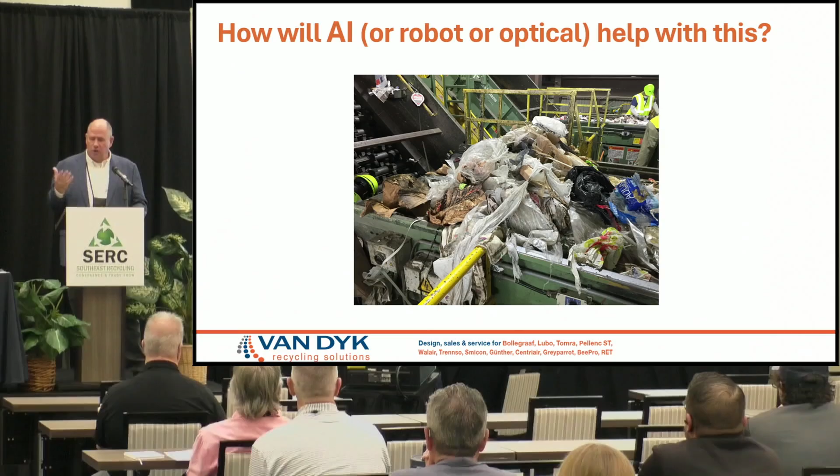This is what our MRFs are faced with today, this type of material. It's really great to talk about how AI can help with this and that, but if you don't do the nuts and bolts of preparing the material properly, it can't see the material to recognize it. We're really doing needles in a haystack.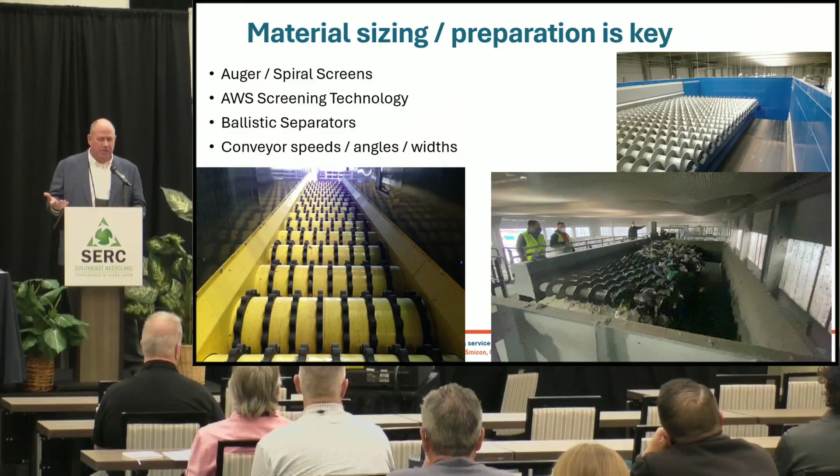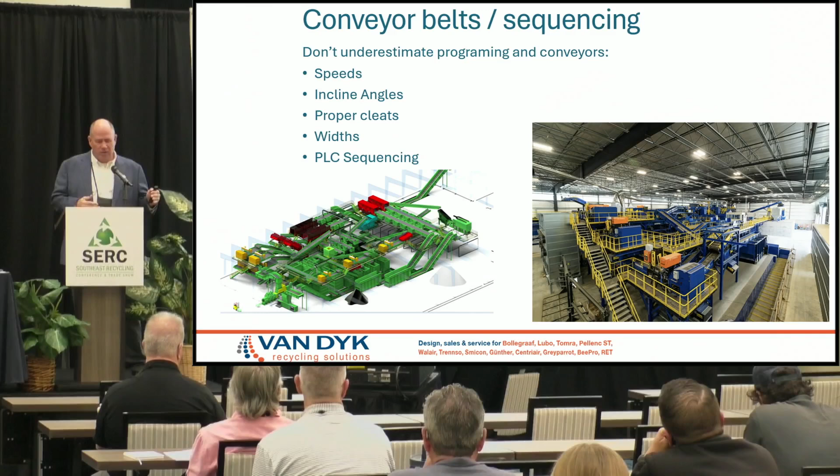This is an auger-type screen, a spiral screen from Günther, a company we represent. You're basically sizing the material and preparing it using non-wrapping screening technology, getting it to single layers. Then it's a combination of conveyors at the right width, the right speeds, the right angles, the right cleats, the right sequencing, and then you get to the optical sorter speed-up belt.

This belt in a modern MRF can run up to 1,200 feet per minute. You need a wind tunnel to do that. If you don't have a wind tunnel at 500 feet per minute, film and paper start to fly around and aren't stable on the belt. So you see the development of air boosters, wind tunnels that allow the belt speed of these conveyors to go at very high speeds, 1,000 to 1,200 feet a minute, but the material is stabilized so the optical sorter can still do its thing and successfully sort.

So this has been a big development because now you can run an optical sorter with very light material, up to 10 or 12 tons an hour.

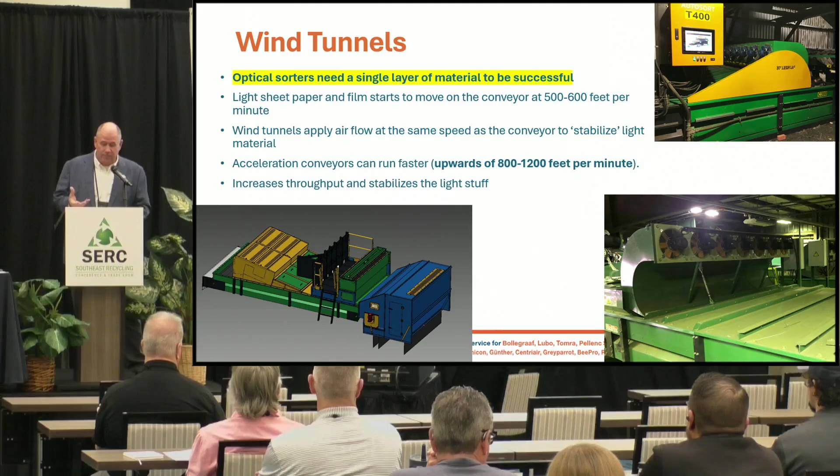Another development, I think Lennart's company represents this, is a Westeria disc spreader. This, in essence, is like a manure spreader if you're in farm land. If you've got a 10-foot wide optical sorter but the material's falling on the belt only 2 feet wide, you're not utilizing that belt properly, you're not getting a proper spread. So this has been a really big development in automated single stream sorting because it allows material to be spread across the full width of a belt, 10 foot plus, to get a nice even feed.

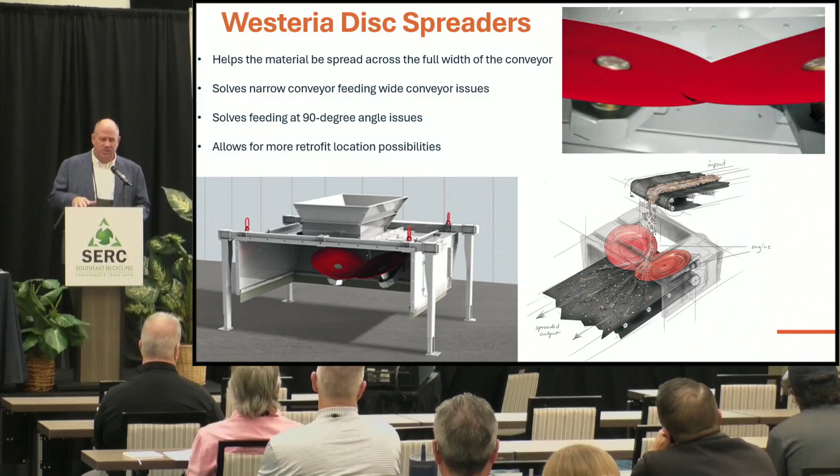This is a picture of the optical setup all tricked out. There's the disc spreader, there's the wind tunnel, the aero booster, there's the high-speed conveyor, which to keep stable at that speed over the course of a shift requires a super heavy-duty conveyor, and then it leads up to the optical.

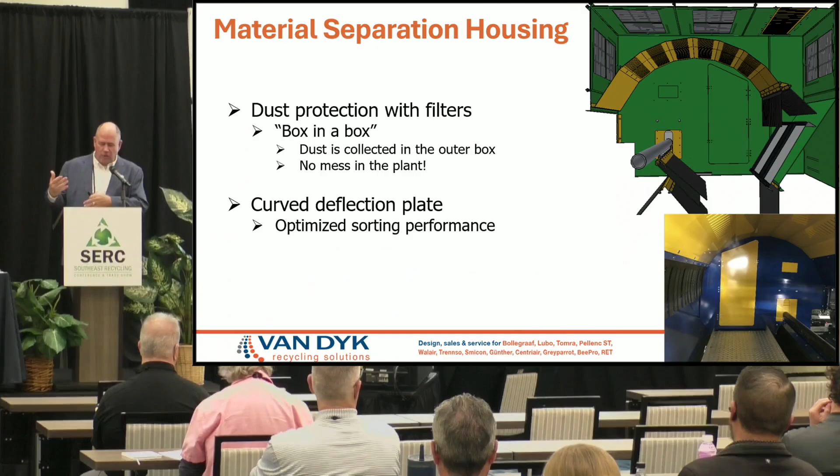Once the optical recognizes and ejects the material, the separation housing has also improved over the last several years to be more accepting, more accurate. The mechanical separation is as important as the optical separation.

Then there's been optical sorter advancements as well over the last several years. Optical sorters being sold today are future-proof; as new technologies come out, they can just be added in. The near-infrared spectrometer that has been the backbone of an optical sorter has been improved and enhanced with higher and higher resolution. Now, using near-infrared, not a camera, not AI, you can see and recognize and determine the difference between linear low and low-density polyethylene.

You can see and recognize and determine the difference between low melt or PET trays from PET bottles, and natural from white and opaque. So the technology has continued to evolve. Black objects can now be seen using a laser.

Metal detection sensors are becoming more the norm, and more recently AI sensors are being incorporated with all of these sensors. I get asked all the time, will AI take over for all those other sensors? My answer is I don't know, but the experts at Pellenc, at Tomra tell me you still need a combination of sensors to make a correct sorting decision.

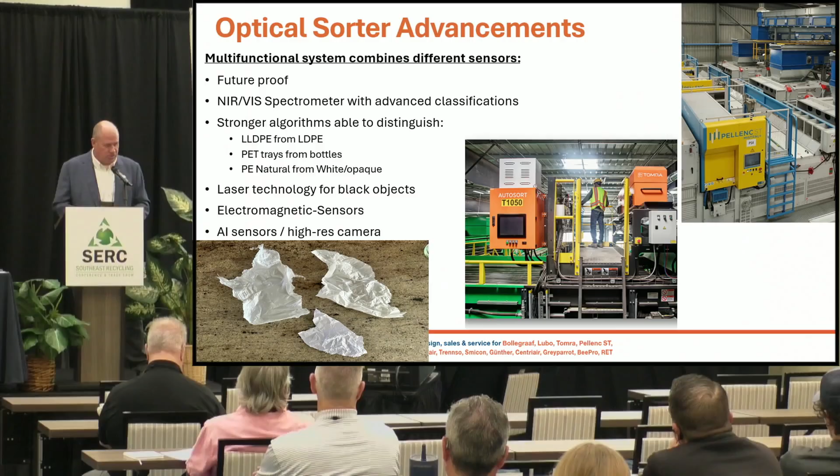We've done a few projects recently where we're given the directive to make clean MRF film. That's very difficult to do. Making clean film, period, is very difficult. Involving it in a MRF environment is extremely difficult. So we ask, what is the spec? The spec we were challenged with is less than 5% prohibitives, basically anything that's not film or flexible packaging, less than 5%. That includes paper.

I think it's the hardest thing that companies like ours do. I really do. It is super challenging. It's not easy. It's not for the faint of heart. I want everyone to think about this.

You leave this conference, you go to a Target, and you buy a pack of batteries. They give you a Target bag, you put the batteries and the receipt in that bag. You get to your car, you pull the batteries out to use them. What remains is the receipt and the bag. At that moment, that's 50% paper and 50% film, and we've got to get to 5% and 95% to even make it considered sellable. So that's extremely challenging, extremely difficult.

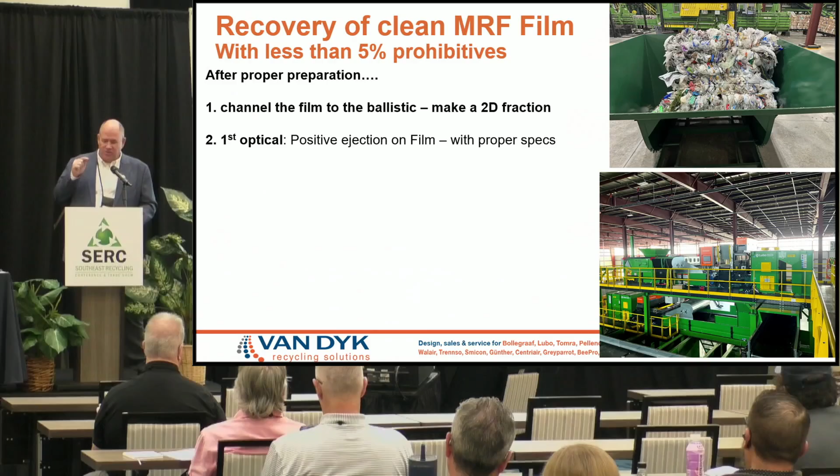How we are doing it, and I'm not saying this is the only way, but this is how we're able to make the spec we're looking for: as discussed earlier, we're using positive sorting throughout a MRF, getting all the other commodities, the fiber and cardboard, out. We're channeling the remaining fraction, heavy with film, to the ballistic separator, making what walks over that ballistic a 2D fraction. We're then sending that to an optical sorter to positively eject on all film. That optical sorter has the right sensors to do its thing, including metal sensor, laser object detection, NIR, and it has an AI sensor in it, so it's got a multitude of sensors to make a sorting decision.

We've prepared the material properly, then we eject positively on anything that's film. Then we go to a second optical sorter. That second optical sorter is set up where you can either eject positively the film again, so it's two times positive, or you can eject anything that's not film. So you have the option to do a negative sort or a positive sort. But that is two steps optically.

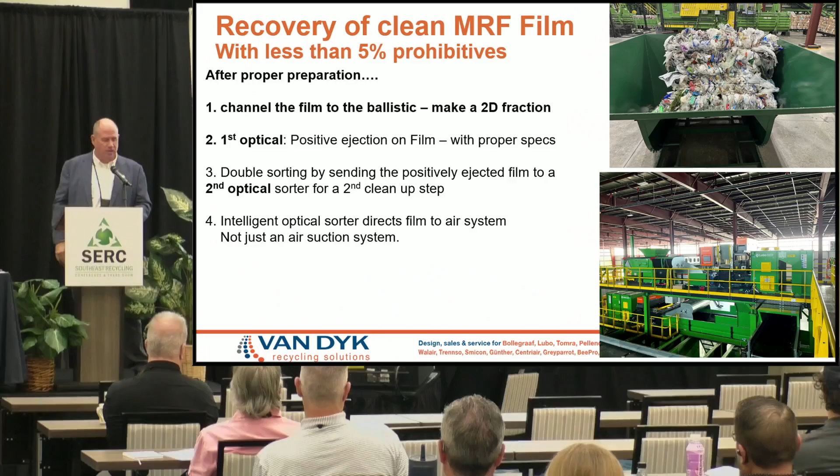Then, if you are going to use air conveyance, we are ejecting from an optical sorter straight into the hood. We're not just letting material float around and hope it gets sucked up there. Then you still need a bunker and a baler. So we're talking about a crazy high amount of capital investment needed to do this, but it is possible. We are making film that is less than 5% prohibitives, but it takes double sorting with a bunch of extra conveyors and a lot of preparation, but it is possible.

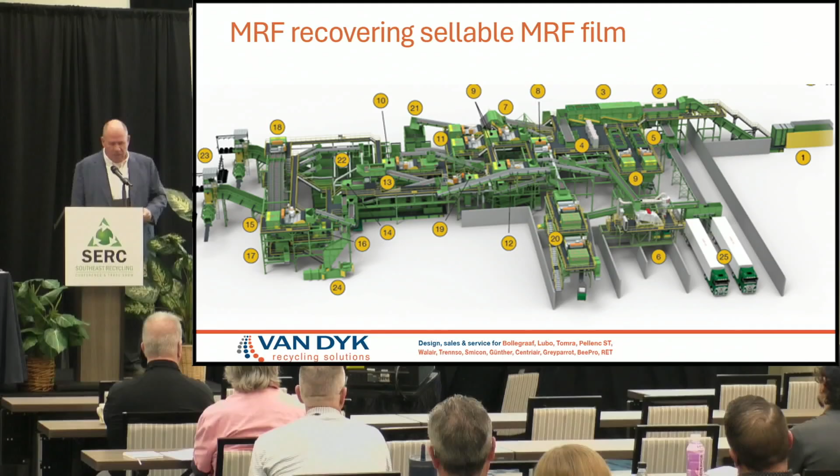That is a picture from the Fort Worth facility that WM has. That tested at 97% film. That's the setup there. This is a 3D model of that system. Where number 12 is, is where the ballistic separator is. It walks the film to where you see number 20 — those are the double optical sorters in line, prepared, and then it makes a clean film from there.

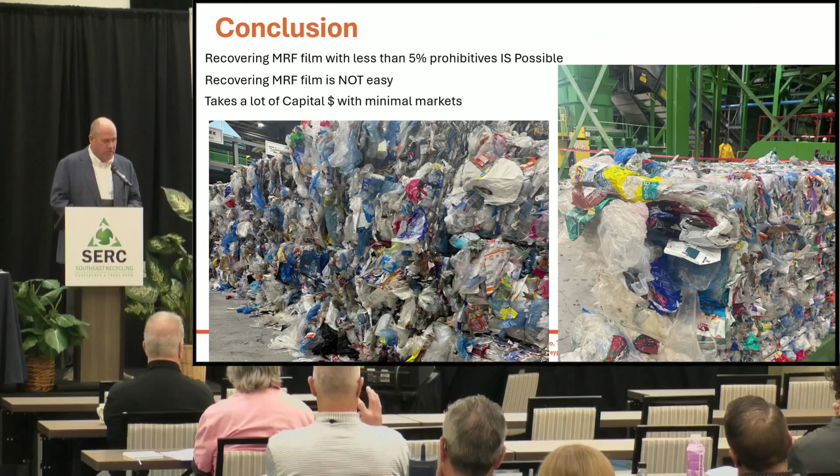These are a couple pictures from the Canadian facility that's also making film to that same specification. So in conclusion, it is possible, it's not easy, it takes a lot of capital to do, and once you have it clean, there is minimal markets to sell to. I really appreciate your time, and take any questions, thanks again.

Those were three really great presentations. I'd like to open it up for questions. Either there's no questions because these guys did a fantastic job explaining everything, or we're very thorough. Yeah, very thorough.